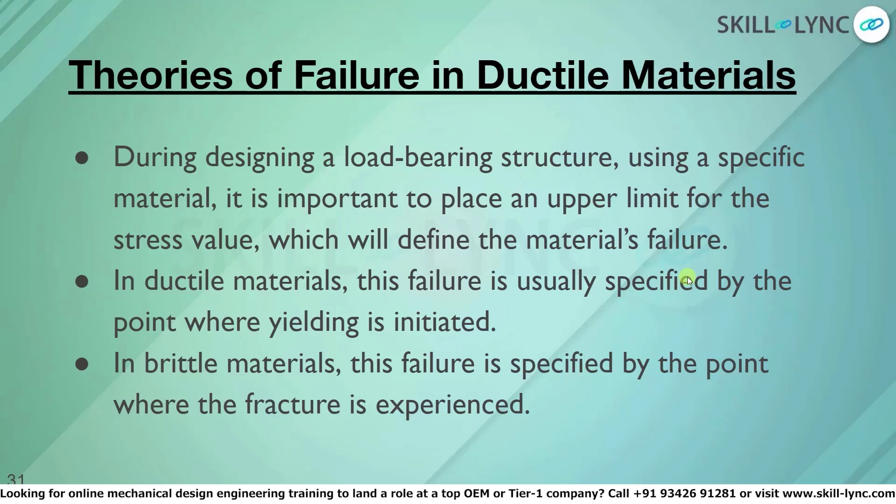For ductile material the failure is specified at that point. Then we have a buffer, which can also be called a cushion time, which will lead to ultimate stress. However, in brittle materials, this failure is specified by the point where the fracture is experienced directly. Basically it's a snap without any indication.

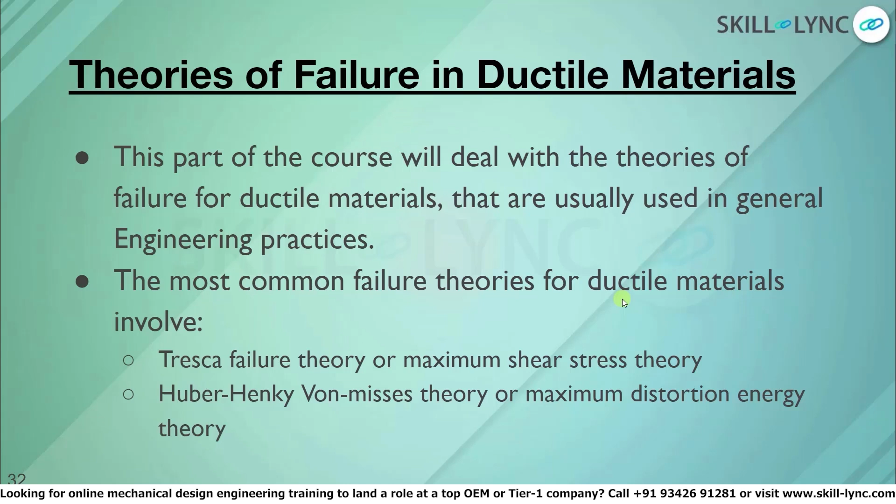Now, like we saw previously, we will be looking into theories of failure for ductile materials specifically that are used in general engineering practices. The most common failure theories for ductile materials involve the Tresca failure theory, or maximum shear stress theory, and the second one is the Huber-Henky-von Mises theory, or maximum distortion energy theory.

The first one we will be looking at is the maximum shear stress theory, which is also called the Tresca theory. A ductile material, one of the simplest examples being steel, usually fails through slipping. This is a very interesting phenomenon, which can be easily seen on a highly polished thin strip that is subjected to tensile loading.

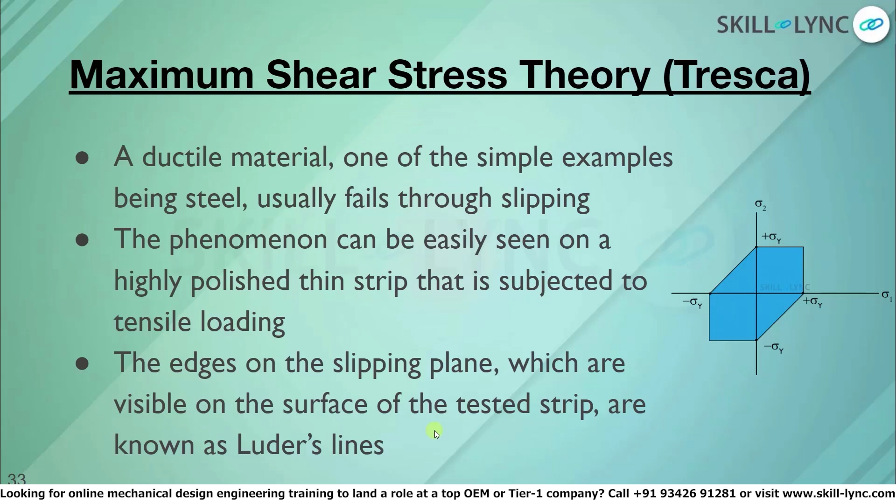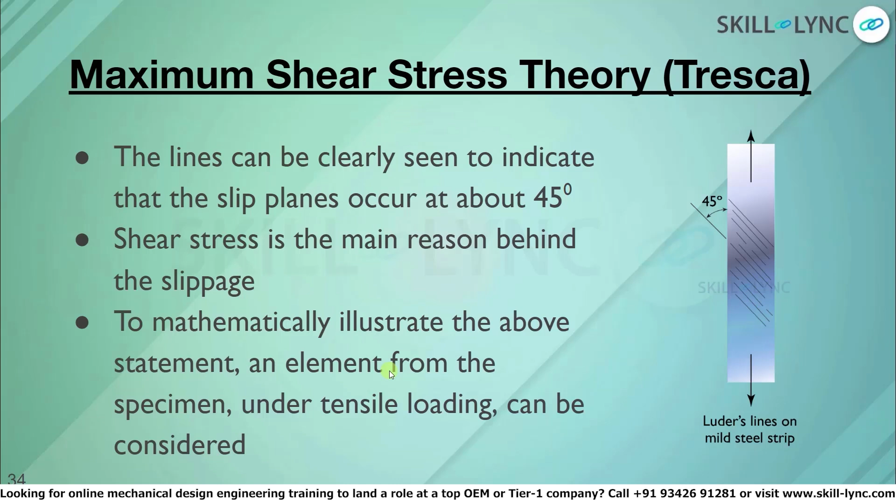Because these lines are at an angle and there is a shear stress because of that, we need to calculate the shear stress based on the state of stress based on loading. The yield stress of that element is sigma y, and the maximum shear stress can be calculated from the Mohr circle as tau max equals sigma y by 2.

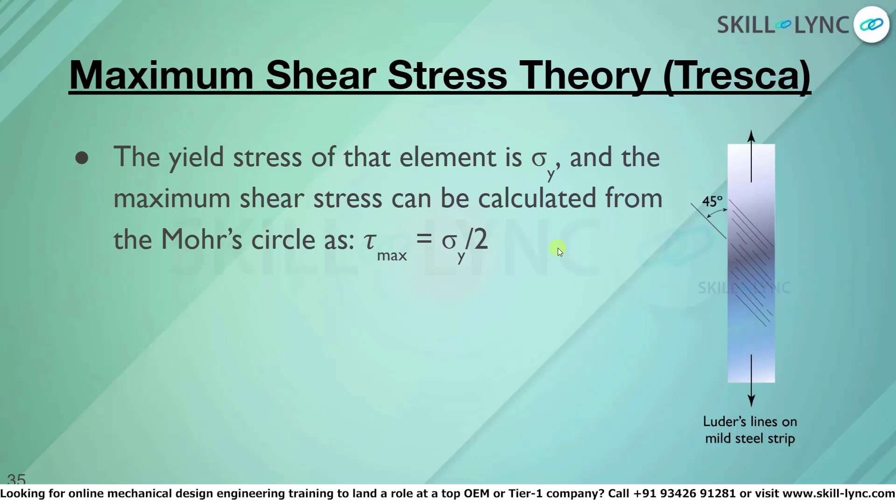Through stress transformation, we can calculate that the shear stress acts at a 45 degree angle with respect to the principal stress planes. Since the plane of shear stress falls where the Luder's lines are, the material fails by shear stress. If we do the calculation, we will see that the shear stress acts at a 45 degree angle and will be transferred to the principal stress plane. Since this angle coincides with that of the Luder line, the material will fail by shear stress.

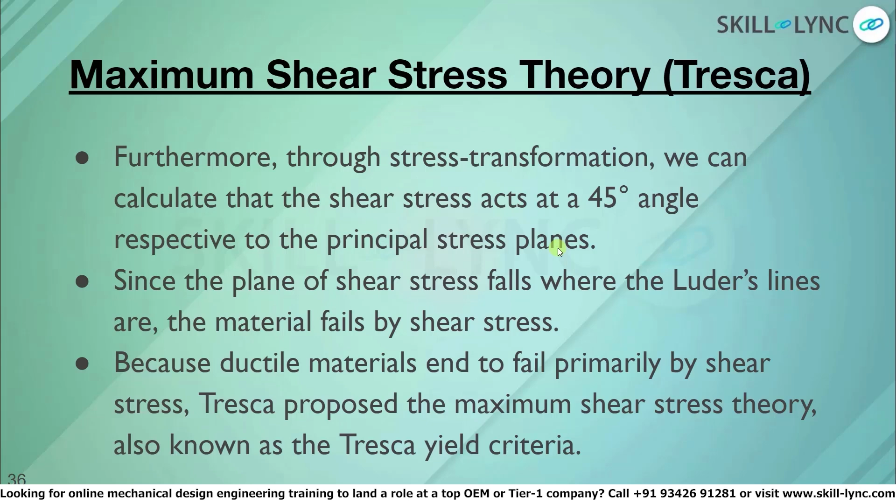Tresca proposed the maximum shear stress theory, also called the Tresca yield criteria, with these concepts. Regardless of the loading type, the yielding of a material is initiated once the absolute maximum shear stress reaches the value of that shear stress that results in the yielding of that structure under axial loads only. Therefore, to limit failure, it is important to ensure that the absolute maximum shear stress is lesser than or equal to sigma y by 2.

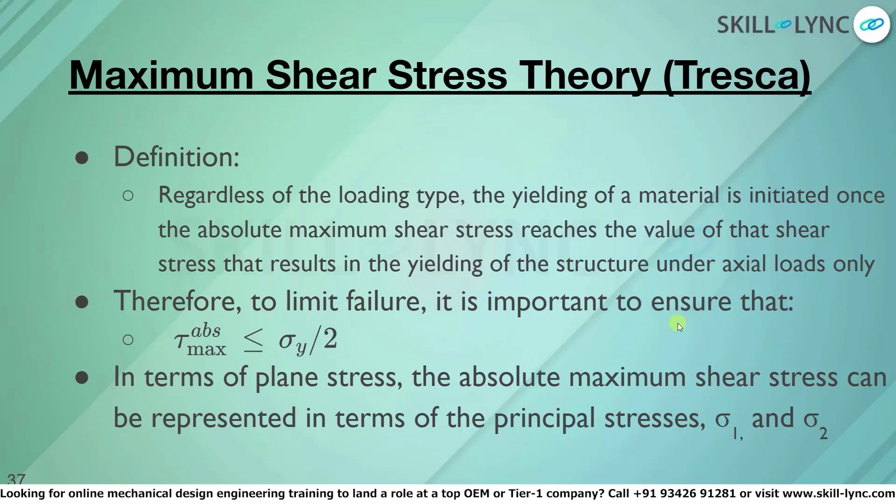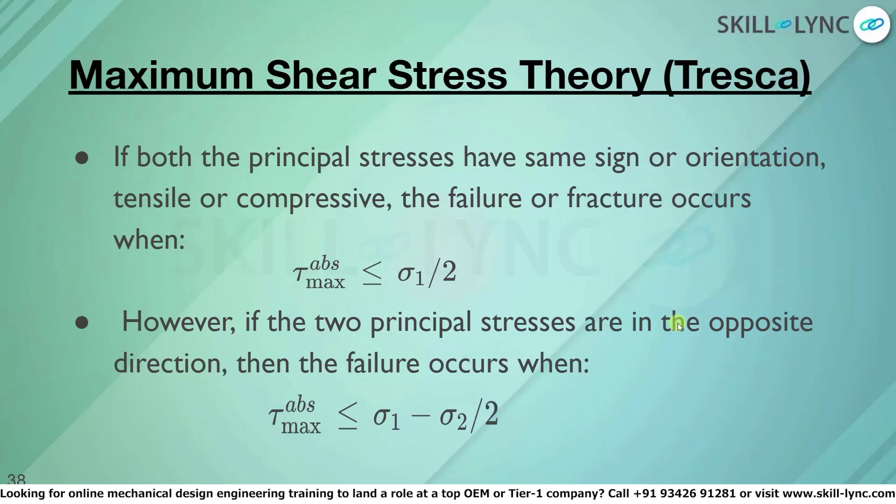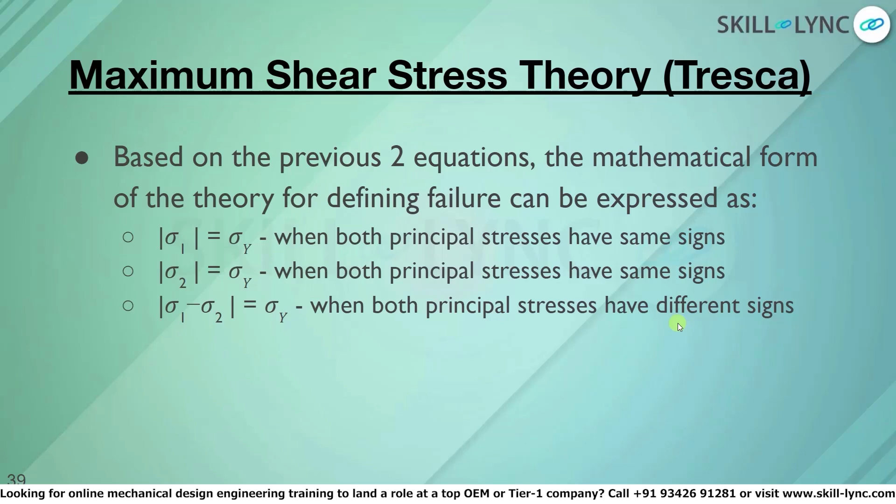However, if the two principal stresses are in opposite directions, then the failure occurs when the absolute maximum shear stress is lesser than or equal to sigma 1 minus sigma 2 divided by 2. Based on the previous two equations, we get these mathematical formulas as our final equations in the maximum shear stress theory. With that, we'll move on to the next theory, which is the maximum distortion energy theory, or Huber-Henky-von Mises theory.

This theory was initially given by Huber, and then it was modified by Henky and von Mises following Huber. A material is known to experience deformation when an external load results in energy storage throughout the volume.

Strain energy density is defined as this stored energy per unit volume of the material. In case of uniaxial stresses, the strain energy can be defined as U equal to 1 by 2 into sigma epsilon. We use this strain energy to figure out the derivation for Beltrami or Haigh theory.

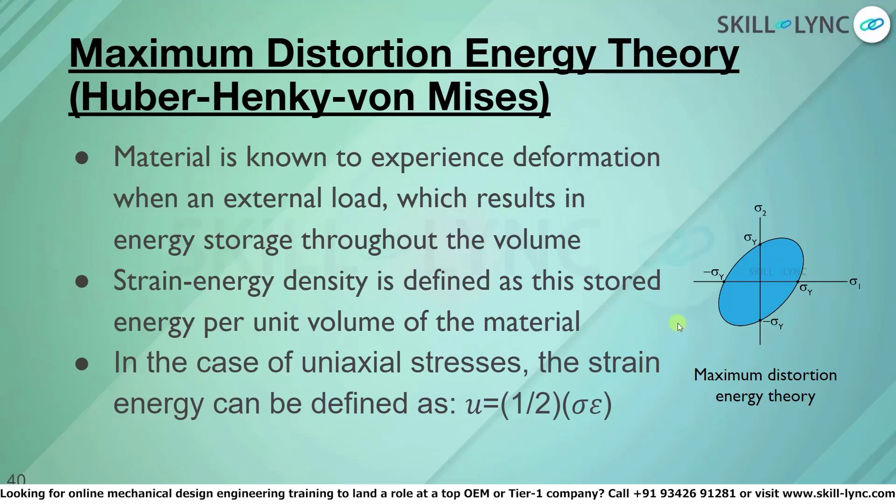Now when we take triaxial stresses, due to contribution of each principal stress, the strain energy density can be given as U equal to 1 by 2 sigma 1 epsilon 1 plus 1 by 2 sigma 2 epsilon 2 plus 1 by 2 sigma 3 epsilon 3.

From the stress theory, or from the strain energy density, the Hooke's law can also be given as U equal to 1 by 2E into sigma 1 square plus sigma 2 square plus sigma 3 square minus 2 mu, where mu is the Poisson's ratio, sigma 1 sigma 2 plus sigma 1 sigma 3 plus sigma 3 sigma 2. Here we have substituted the generalized Hooke's law equation in place of epsilon 1, epsilon 2 and epsilon 3, and arrived at this solution.

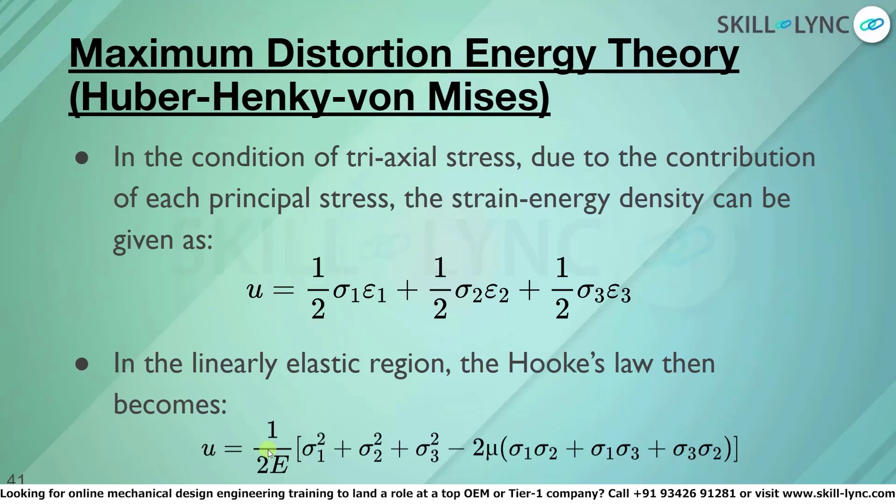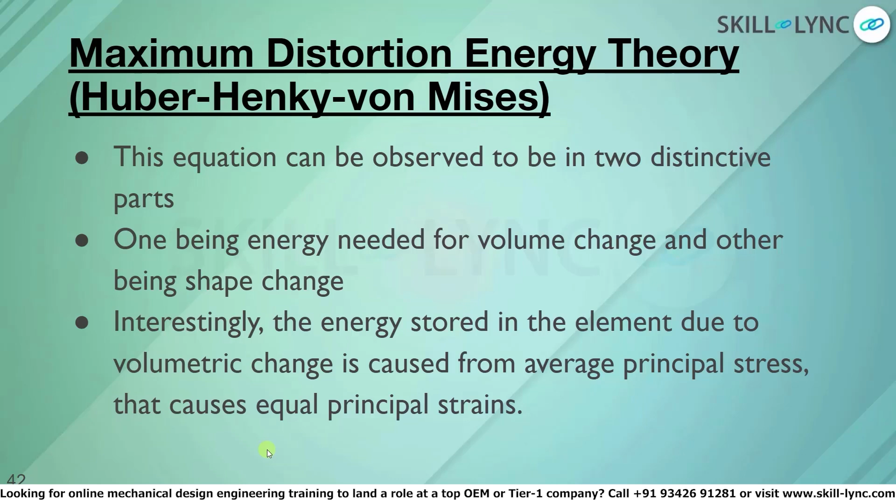Interestingly, the energy stored in the element due to volumetric change is caused from average principal stress that causes equal principal strains. The remaining portion of the stress equation results in energy for shape distortion. Generally, materials do not yield under a uniform hydrostatic load or average stress.

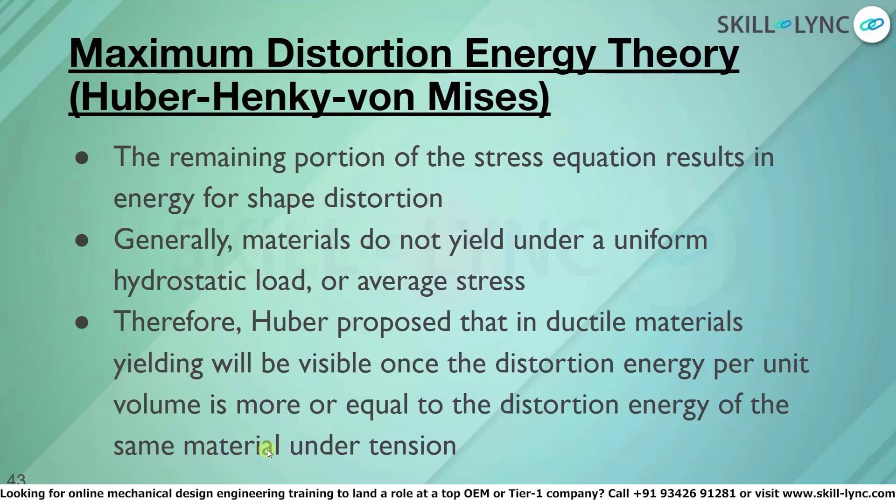Therefore, Huber proposed that in ductile materials, yielding will be visible once the distortion energy per unit volume is more than or equal to the distortion energy of the same material under tension. From whatever Huber proposed, we can obtain an equation with that, which is sigma average equal to sigma 1 plus sigma 2 plus sigma 3 by 3.

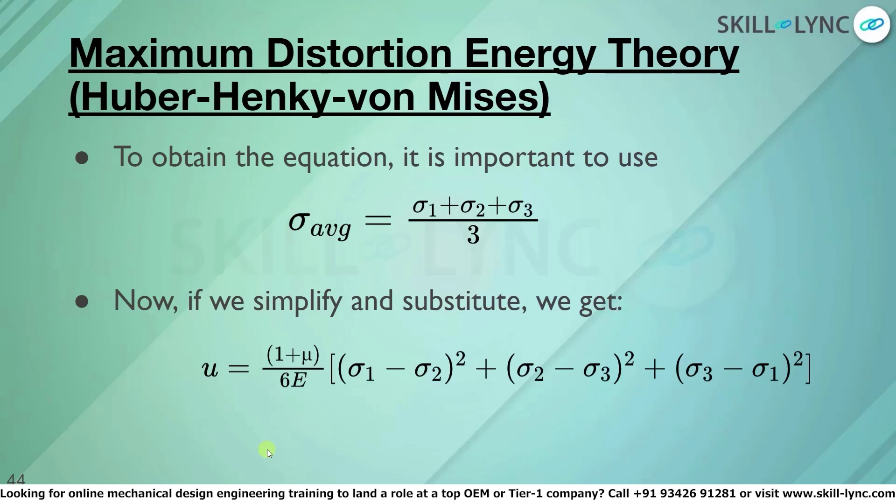Now substituting sigma average in the previous equation which we saw, we will get a modified version of the strain energy equation, which is U equal to 1 plus mu by 6E into sigma 1 minus sigma 2 the whole square plus sigma 2 minus sigma 3 the whole square plus sigma 3 minus sigma 1 the whole square.

Now we know that in case of plane stress, sigma 3 is equal to 0, because it's a biaxial case. Therefore, substituting sigma 3 as 0 here, we get U equal to 1 plus mu by 3E into sigma 1 square minus sigma 1 into sigma 2 plus sigma 2 the whole square.

So finally, for uniaxial tension, where we can take sigma 1 as sigma y and sigma 2, sigma 3 equal to 0, we will get U equal to 1 plus mu by 3E into sigma square y. This is the simplified version of the previous equation.

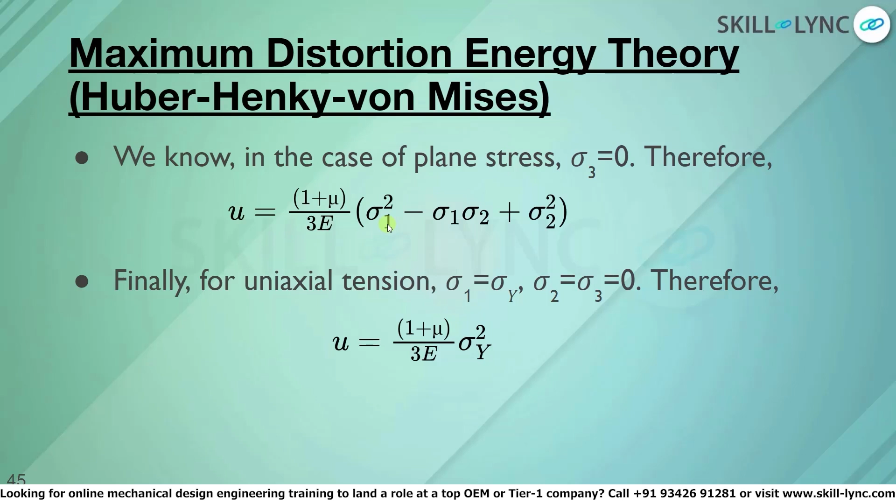Now if we see here, we can always equate sigma y square to sigma 1 square minus sigma 1 sigma 2 plus sigma 2 the whole square. Therefore, from maximum distortion energy theory, wherein U equal to Uy, we get sigma square y is equal to sigma 1 whole square minus sigma 1 sigma 2 plus sigma 2 the whole square.

When we take this equation in a mathematical form, we can say that it is an equation of an ellipse. Therefore, if the material is stressed enough to have a point outside the ellipse, the material will fail.

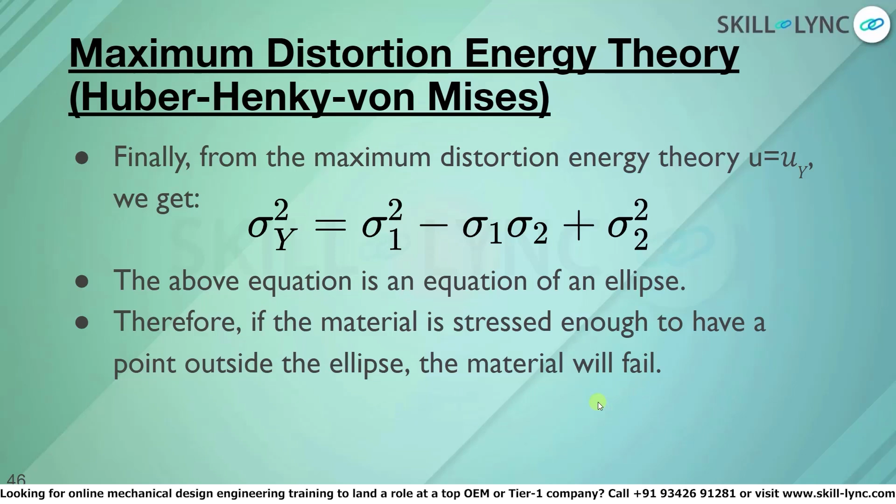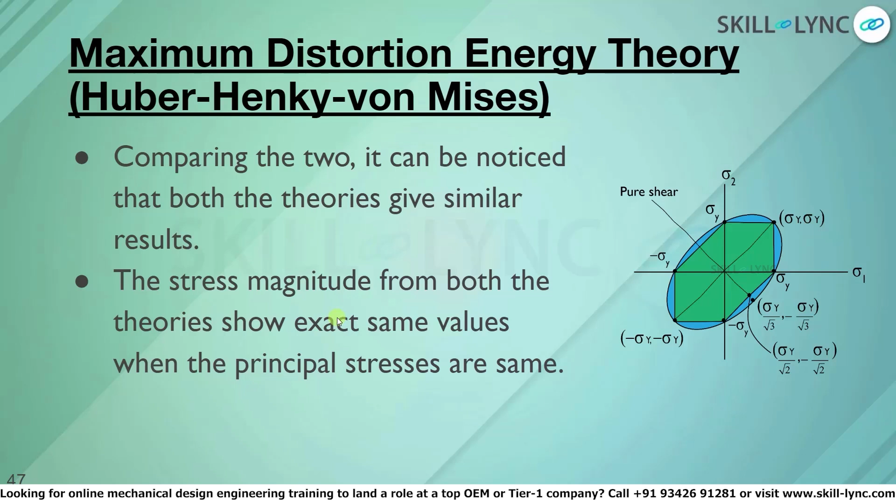One thing we have to note here is that comparing the two, it can be noticed that both theories give similar results. Because both the Tresca theory and Huber-Henky-von Mises theory play in the same field region and with nearly the same variables, we can say that it gives similar results. The stress magnitude from both theories shows exact same values when the principal stresses are same.

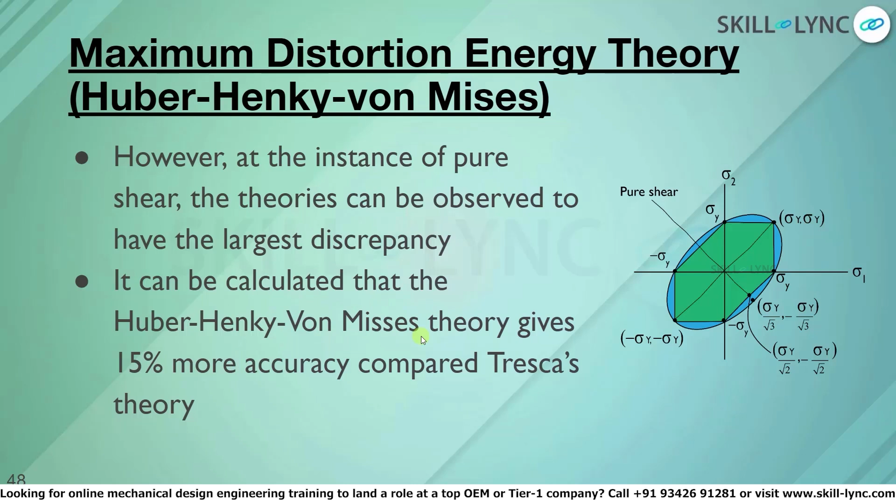But when it comes to pure shear, the theories can be observed to have the largest discrepancy. Experimental calculations say that Huber-Henky-von Mises theory gives 15% more accuracy compared to Tresca's theory.

The next mode of failure criterion will be failure criterion for brittle materials. Again, we have a few theories of failure in brittle materials. The general theories that we use in engineering practices are maximum normal stress theory by Rankine and Mohr's failure criteria. We will be seeing only these two criteria.

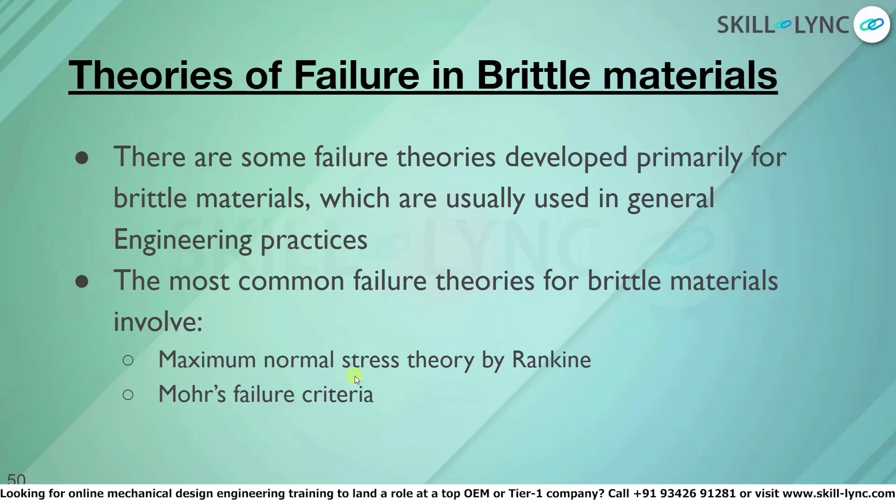Under maximum normal stress theory by Rankine, brittle materials tend to fail suddenly under tensile loading. It undergoes fracture without showing any yielding, failing without giving any indication. Fracture is seen only after the material reaches ultimate tensile stress, also known as ultimate tensile strength, abbreviated UTS.

But when we take ductile materials, for example materials like polypropylene, it has a very long necking time before it fails. But like we saw earlier, for brittle materials, after the first crack initiates, the material breaks away very fast when it is in tension.

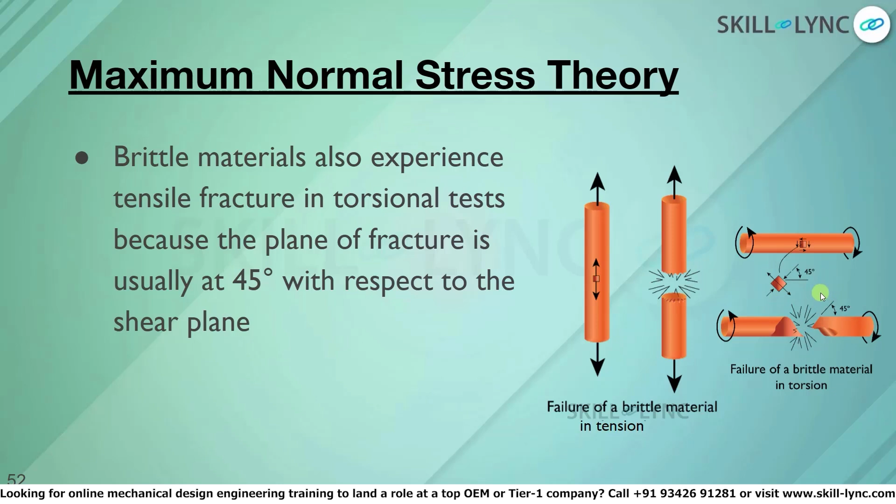It has been proven through experiments that under torsional loads, the material's overall strength is minutely affected by the presence of the associated principal compressive stress. Therefore, the stress that results in fracture during the normal tensile test is the same as that needed for the material to fail under torsional loading. So from this we can understand that compressive stress doesn't really result in significant failure - it is usually the tensile load and associated tensile stress that results in actual failure of the material.

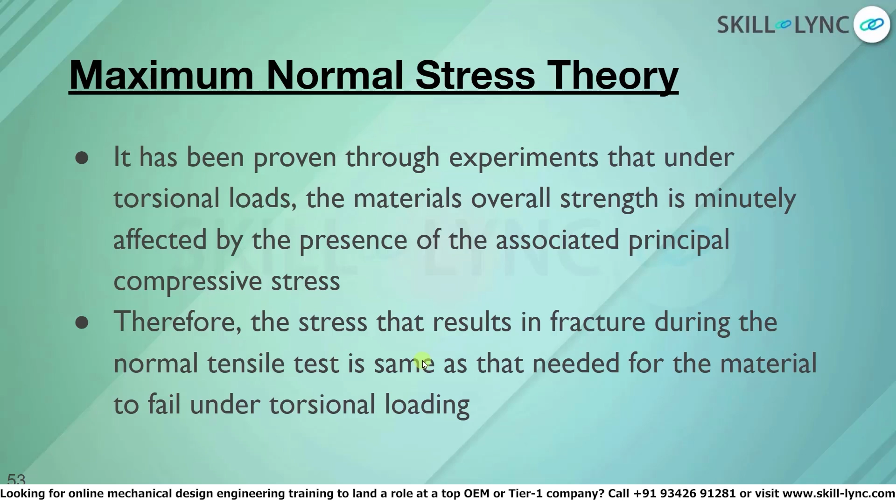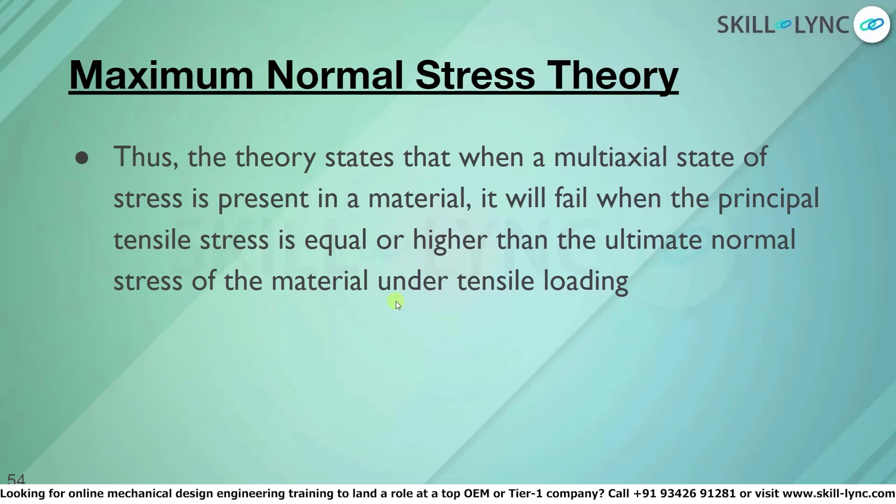Under tensile loading, the failure observed is actually the stress that results in fracture of the material system. So the theory is primarily based on principal tensile stress, and states that failure occurs when the principal tensile stress is equal or higher than the ultimate normal stress of the material undergoing tensile loading. This ultimate normal stress is defined by ultimate tensile stress because the action of compressive stress is negligible. For this theory, chalk is a good example of a material that experiences similar failure.

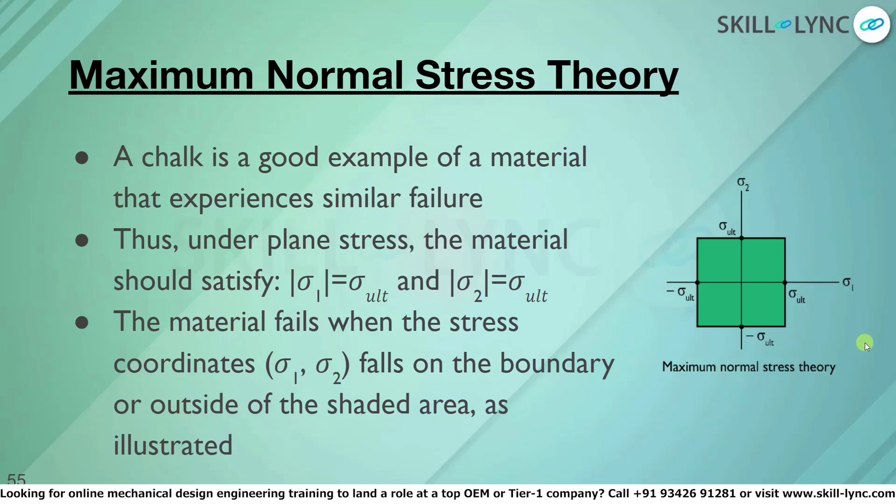So this is given as the maximum normal stress theory. Next we will move on to the Mohr's failure criterion.

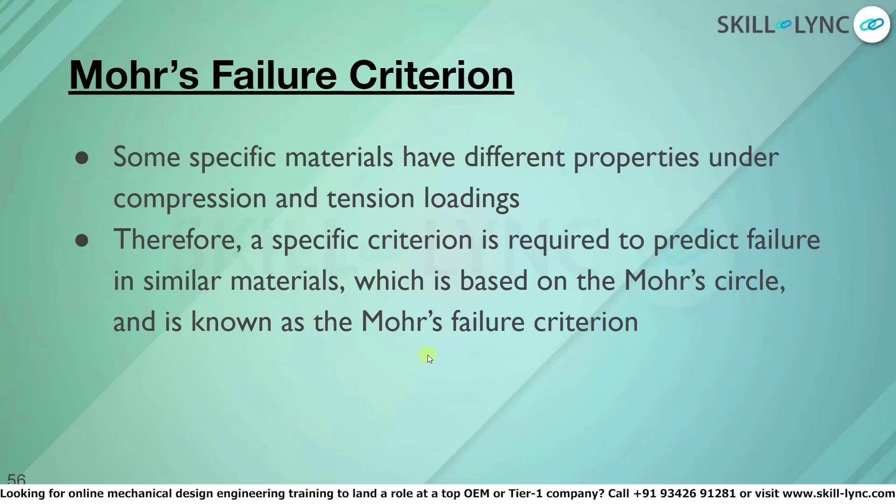Some specific materials have different properties under compression and tension loadings. Therefore a specific criterion is required to predict failure in similar materials, which is based on the Mohr circle and is known as Mohr's failure criterion.

To successfully apply the criterion, it is required to perform 3 tests. These will be used to apply Mohr's failure criterion and find out the failure range. The 3 tests are: uniaxial tensile test to get the ultimate tensile stress, uniaxial compressive test to get the ultimate compressive stress, and torsion test to get the ultimate shear stress.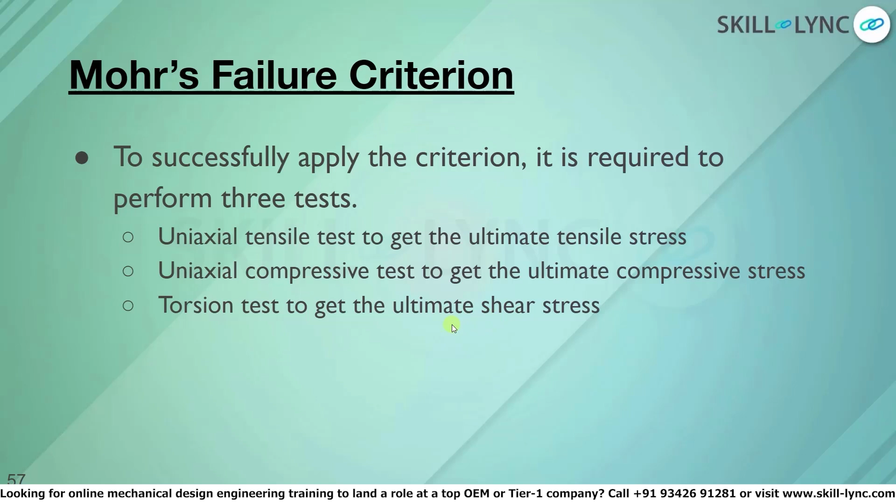Now the Mohr circle for each of these conditions is plotted. On the right side, 3 circles are plotted and the common regions are taken out of those 3 circles. This common region is used to create a failure envelope, as we discussed before.

If the plane stress condition of a particular state of stress makes a tangent to the envelope or lies outside the boundary, it will result in material failure.

Like how we saw in the previous mode, wherein we had a square, and if the coordinate points resulted on the boundary of the square or outside it, we said it will undergo failure. Same way here, if the plotted line or points are tangent with the boundary of this common region or fall outside it, the material is undergoing failure.

The 2 materials we saw were mostly based on stress, and we didn't come across many equations because both these criteria have to fall under a region of the coordinate system, in which we use the Mohr's circle to depict the failure.

So with that we have come to the end of the failure theory. Now we will see some examples relating these failure theories.

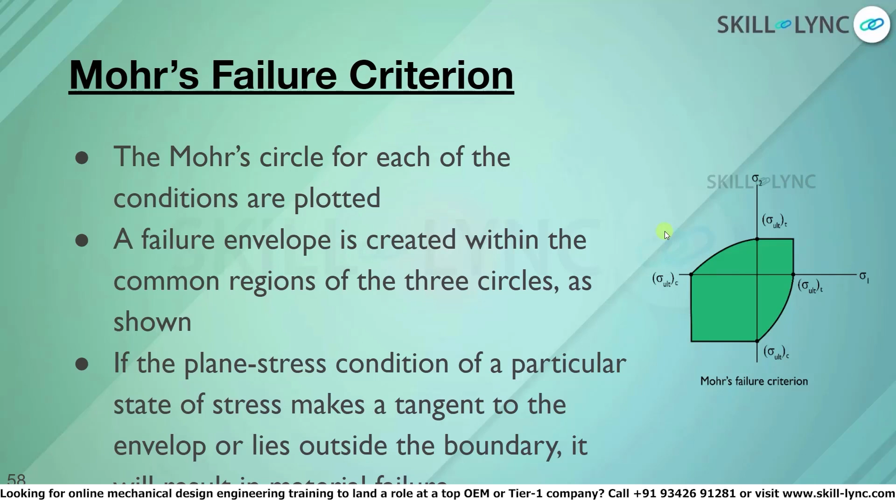Here's an example: a solid steel shaft has a diameter of 1 inch and yield stress of 36 ksi. Yield stress is sigma y.

We will have to determine whether the loading causes failure, using 2 failure theories: the maximum shear stress theory and the maximum distortion energy theory. The first is basically the Tresca theory and the second is the Huber theory.

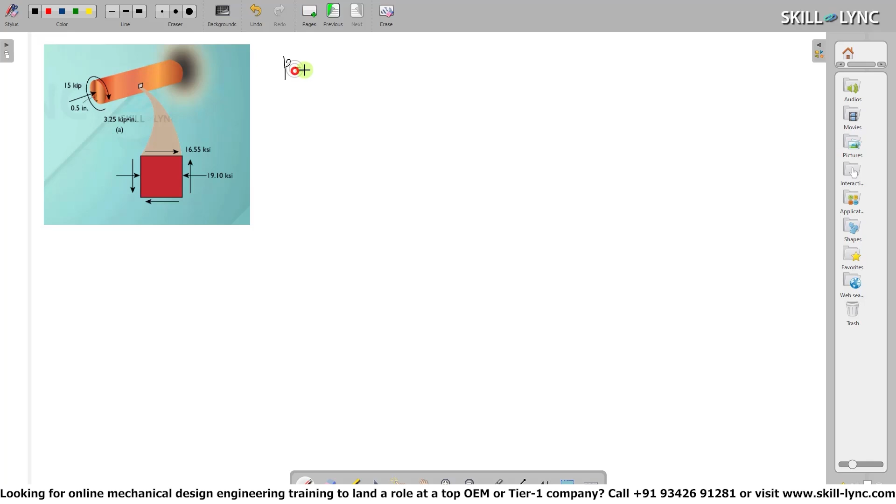First, we will note down the given values. The first value is P, the axial stress, which is 15 kip. Next there is torsion involved, which is equal to 3.25 kip inch.

We know that the diameter is equal to 1 inch, therefore the radius will be equal to 0.5 inch.

It is important to figure out the cross sectional area to get values for the force, since stress is equal to force by area. For the cross sectional area, A equals pi r squared, as this is a tube and the cross section is a circle, which will be equal to 3.14 into 0.5 squared, equal to approximately 0.79 inch squared.

We know that torsion loading influences torsional stress and axial loading influences axial stress. We saw about torsional loading in our previous sessions, and the torsion loading will give us torsional stress.

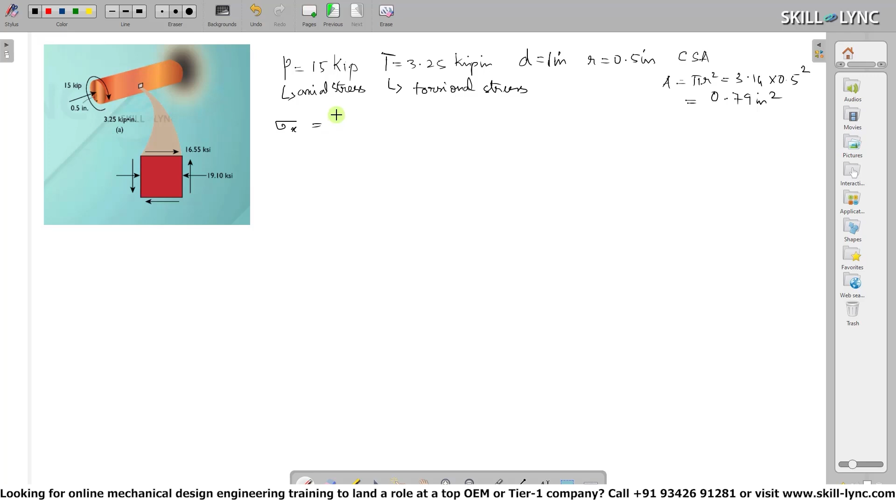Now, when we take sigma x, the axial stress or normal stress, we can say it's going to be P by A, which is equal to 15 by 0.79, equal to, after calculation, 19.1 ksi.

In the same way for torsion, we already know the formula: tau xy will be equal to T into C by J, where T is our value of torsion, C is the maximum length at which this torsion is happening - here the maximum length is the radius since torsion happens at the surface, so C equals 0.5 - and J is the polar moment of inertia, which we've seen in the session on torsion.

By substituting these values, it's going to be 3.25, the torsional value, into 0.5 divided by pi by 2 into r to the power 4, where r is equal to 0.5.

So with that, tau xy will be equal to 3.25 into 0.5 divided by pi by 2 into 0.5 the whole power 4. So tau xy will be equal to 16.55 KSI. Now, although these values are given here, if you can see, these values are already given.

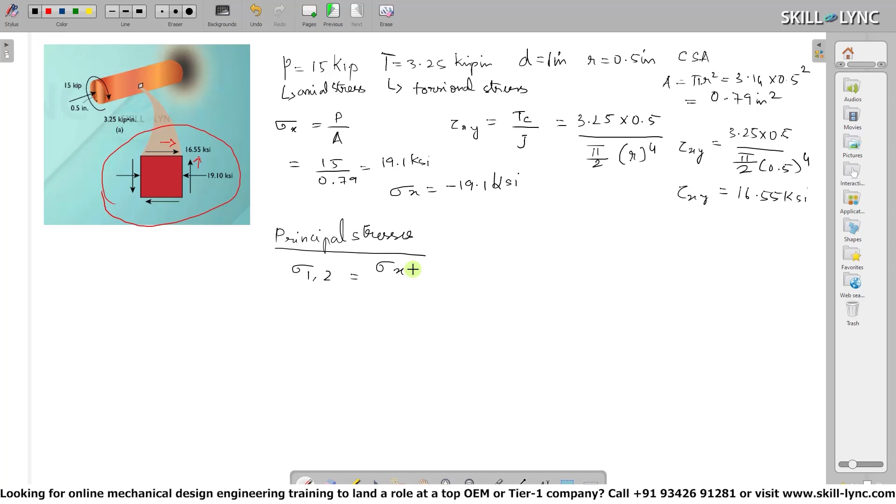So for our principal stresses, sigma 1, 2 is equal to sigma x plus sigma y divided by 2, plus or minus root of sigma x minus sigma y by 2 the whole square plus tau xy the whole square.

Now here we only have axial loading in the x-axis. There is no y-axis loading. So we can say that our sigma y is equal to 0. So if sigma y is equal to 0, this value is equal to 0, and this value can also be given as 0.

Sigma 1, 2 is equal to minus 19.1 by 2 plus or minus root over minus 19.1 by 2 the whole square plus 16.55 the whole square. Now after simplification, we will get sigma 1 as 9.56 KSI, and sigma 2 will be equal to minus 28.66 KSI. Now that we have got the values for sigma 1 and sigma 2, we can go ahead and calculate the fracture criteria.

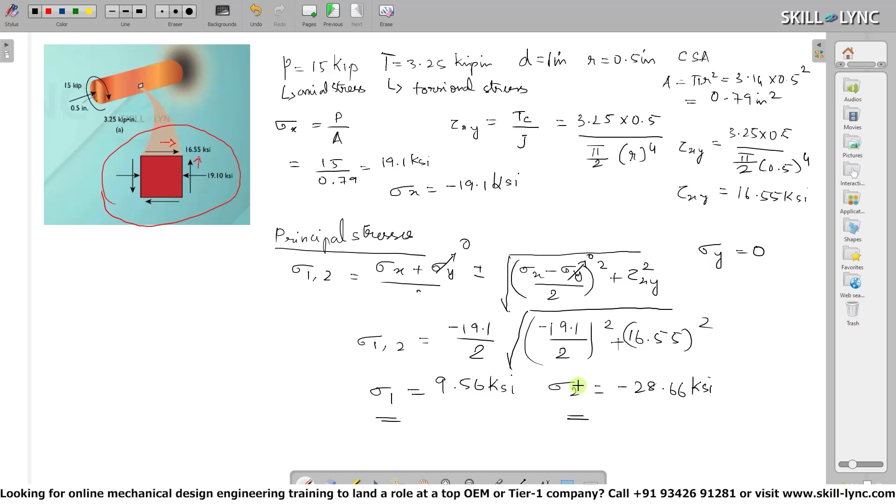Our first criteria here will be the maximum shear stress theory.

So in the maximum shear stress theory, we came across few conditions. These conditions were when sigma 1 and sigma 2 are of same signs, and sigma 1 and sigma 2 are of different signs. Now by these conditions, we can see that we have different signs in sigma 1 and sigma 2.

So according to that condition, we have to satisfy modulus of sigma 1 minus sigma 2 to be lesser than or equal to sigma y. And in the question or problem statement, it is already given that our yield stress is equal to 36 ksi. Now calculation of sigma 1 minus sigma 2 modulus should be lesser than or equal to sigma y.

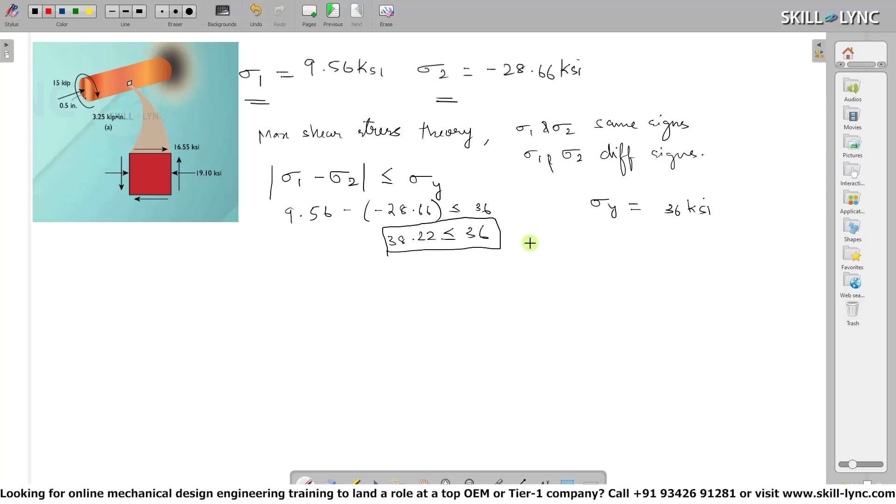So substituting values for sigma 1 and sigma 2, 9.56 minus 28.66 should be lesser than or equal to 36. And after calculation, we get 38.22 less than or equal to 36. Now with this, we can say that shear failure will occur.

Now for this given torsion and given load, the material cannot withstand shear failure. We should also note that shear failure is the most prominent failure than any other failure in any material. So now we'll go to the next type of failure.

The next type of failure criterion is going to be our maximum distortion energy criteria.

So by this criteria, the formula given was sigma 1 square minus sigma 1 into sigma 2 plus sigma 2 square should be lesser than or equal to sigma y square, wherein again sigma y is 36 ksi, and that's given. So substituting those values here.

9.56 the whole square minus 9.56 into minus 28.66 plus minus 28.66 the whole square should be lesser than or equal to 36, this is 36 square. So after simplification, we get a value of 1187 lesser than or equal to 1296.

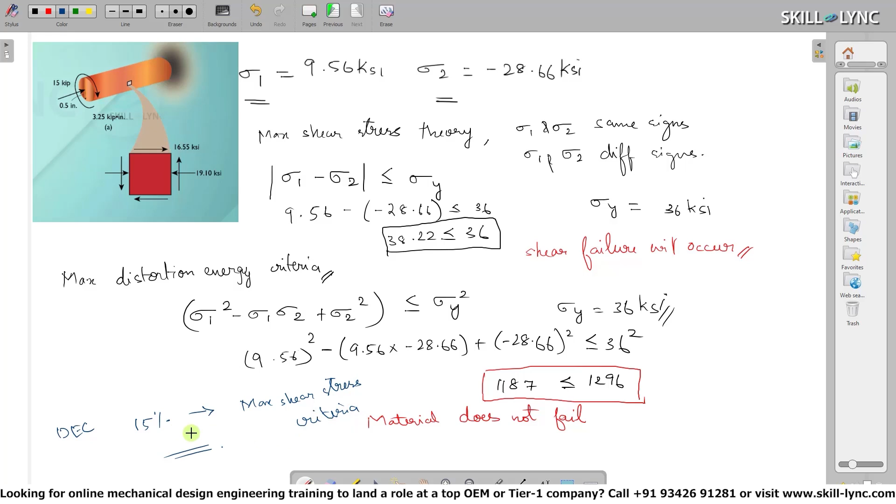So with that, we can conclude that the material does not fail, because usually DEC or the maximum distortion energy criteria gives us better results.

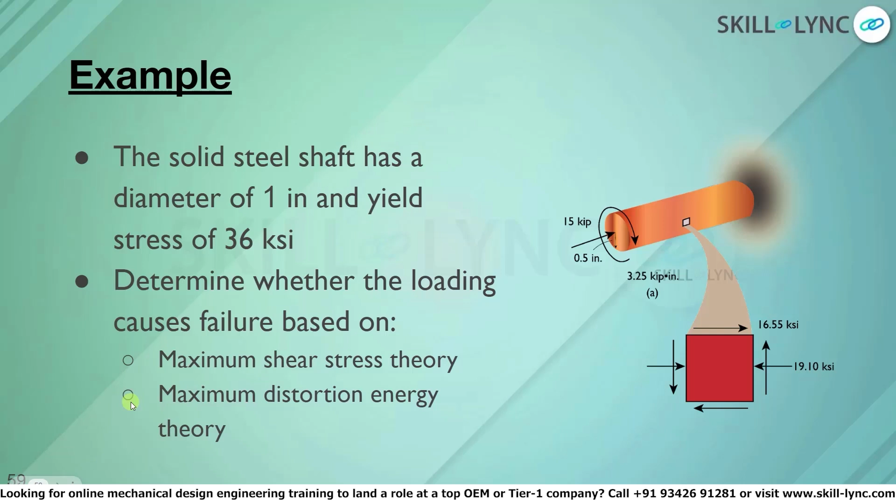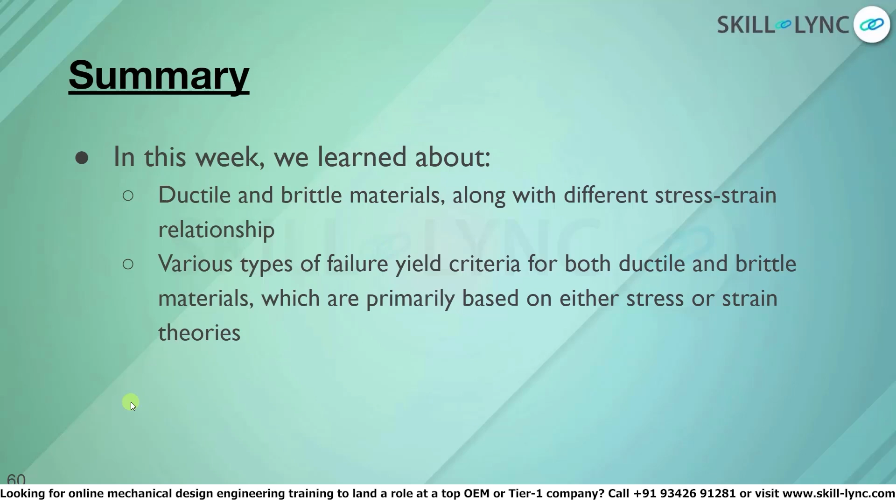So with that, we come to the end of this session, and this is the last session, which is our failure criteria. In this session, we learnt about ductile and brittle materials. We came across different stress-strain relationships for ductile and brittle materials. We saw different types of failure yield criteria for both ductile and brittle materials separately, and these theories were based on either stress or strain theories. With this, we conclude our strength of materials course. Thank you.